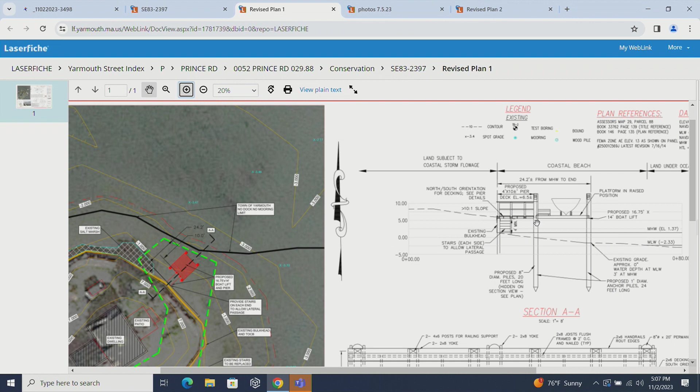So if I could answer that, that dock line was pulled from the town maps. Waterways reviewed the line, they accepted the line, so that's the line. It's no different from a zoning line. You can't just say, I don't like it, because I don't think it's that way. That's the line.

But if you look at all the, do you have that available? Because they did not, when they made these maps, purposely go all along the shoreline, because it would diffuse the coloring of the shoreline. So yeah, I agree the intention of the map is to include the area along the shoreline. I know it is. It's not shown as such. I know it's a broad drawing.

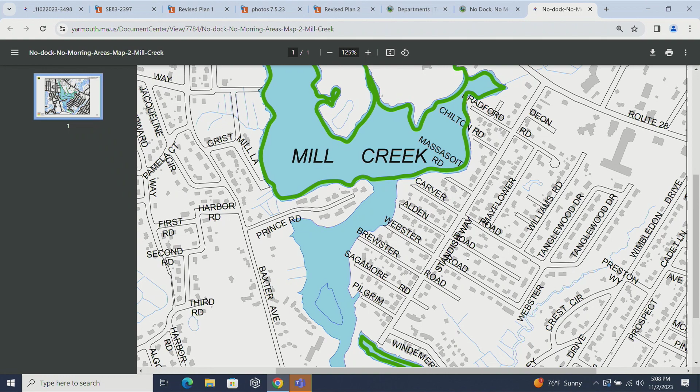Can I make a comment? Hi, Paul Cruz, the property owner, with my wife Nancy Deneen. I discussed with Brittany a bit, and I met with the harbor master. We're proposing to stay out of that dock zone and stay basically out of the channel, which actually sticks further out there. And when the line goes across, the small lift was proposed to stay out of that dock zone. Kind of have a little tiny triangle, because I'm the house on the end there. Just stay out of the no dock zone.

And that's why we didn't propose it on the south side when we went to Waterways—there was a lot of opposition because of a natural channel, the creek everyone's familiar with. So we went back to the drawing board. I met with Bill, the harbor master, and we came up with this little short lift that stayed out of everybody's way and was out of the no dock zone, because everybody at that meeting wanted us to put it on the north side, and I said we can't do that.

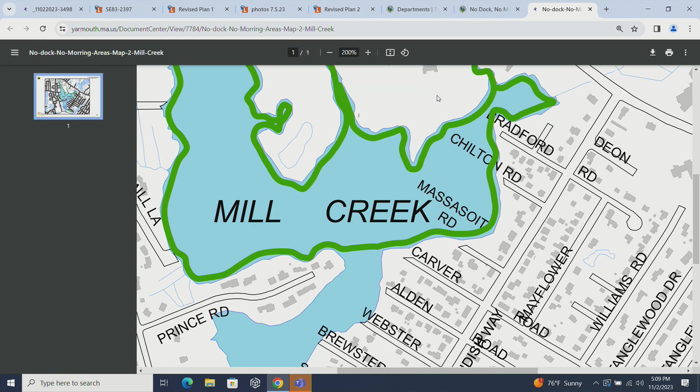There's a no dock zone, and I didn't want to ask for permission to put something in the no dock zone. Just one more comment on the map: if you look at it, his house is shown on the map. Our dock is coming straight out from his house, and you can see that the green line is clearly well north. We're actually a lot more conservative on our plan than that plan is. And that's what it is.

Okay, I just said I had a comment on that. I was here when they made those lines, and yes, it's all along the shoreline, but I believe it was from that corner to the other corner. This is awfully close to that, but that's just my opinion. I was not at that Waterways meeting, so I would have brought that up then.

Okay, Rick? In my 14 years on the Conservation Commission, I have never seen an application with a 0-inch mean low water baseline for this. I'm astounded by the temerity of the applicant to even submit this application. So I think you know how I'm going to vote on this.

Can I comment? That's another thing—it's not zero, that's what it says in your plan. So I have to rely on your plan to make my comment. Mean low water is a line on the plan. We're not proposing anything different. Now, you're nowhere close to the 3 feet we need in our regulations. There are also two other identical facilities permitted in about 1.5 feet of water that you approved. Before my time. All right, thank you.

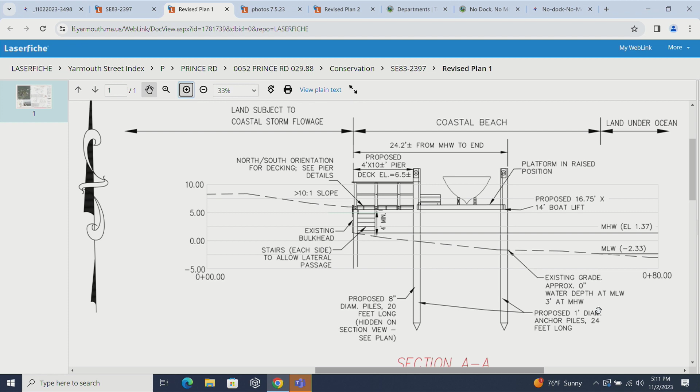Something else they should have picked up too.

Rick, anything else? No, thank you. Anybody else on the commission?

I agree with Rick. I just see it being way too low to allow it to happen.

Brittany? I agree with the depth issue. Even at high water, you have 3 feet at mean high water, which does not leave much time on either side to meet that 3-foot depth minimum.

No other questions? If I could just comment for the record, everybody's saying the 3-foot depth minimum. The 3-foot depth minimum is for floats. We don't have a float, so all the comments are just clarification that there is no float. The regulation is for floats. We don't have a float, so all those comments should be directed to say in the record that the boat is within that, not the float, because there is no float. Just for the record, that's all.

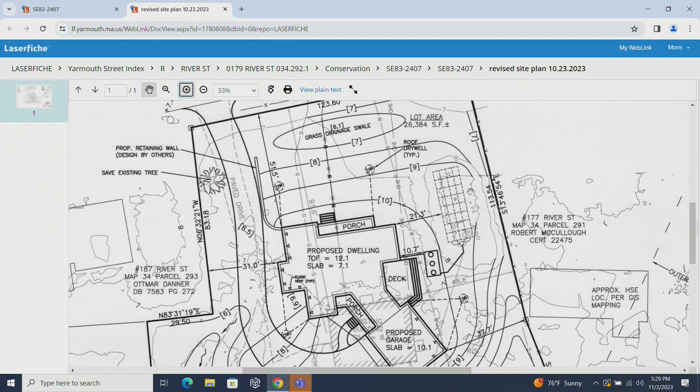I'll highlight some of the changes. We've removed over 1.5 feet of fill from the front of this property. There was concerns about too much fill, so we've lowered the grades, especially in the front, and we've also added a grass drainage swale for that front yard to ensure any drainage water in the front is collected and retained on site. I've also altered the driveway slightly to tighten up that grading in the back, and shown a low point and a swale to the 2 rain gardens to ensure stormwater stays within this property and those rain gardens are properly utilized.

And we've also moved the driveway away from the large existing oak tree with the neighbors there. So I hope that has addressed your concerns, and I'm happy to answer any further questions.

Okay, any questions from the board? Just looking at my notes from last week, so if you give me 1 minute. Okay.

What about the tree? Did you mention that? Yep, so I did make a note that we're gonna save that existing large tree, and I moved the driveway a little further away to not impact the roots. Got it, thank you.

This grass drainage swale on the abutting project, is that - Yeah, that's just shown for reference. I just wanted to make it known that was approved with the abutting property. In reality, that's gonna be a nice low point for all the stormwater to collect there, but I am showing a separation between the two properties and the stormwater there. Okay, thanks.

I know Ellie mentioned last meeting about stairs. Did you? Yep, so I have shown the correct number of stairs on all the decks and porches. It's 4 or 5 risers into those decks and porches due to the grade. Thank you, I see them now.

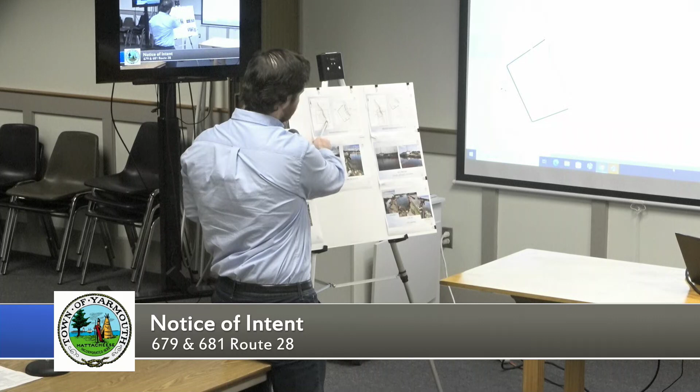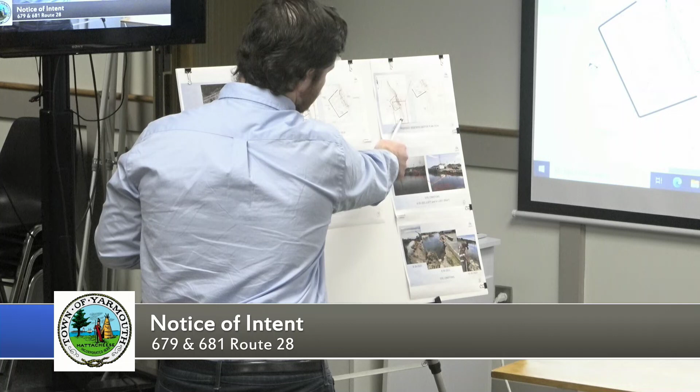As you can see, we're proposing to fill in the area between the existing revetment locations with a bulkhead that will be protected with some toe stones, and then add a buffer strip of native vegetation along the south side between there and the existing building. Here's a section.

Here's a view of the existing site conditions at high tide. Part of the reason we'd like to consider the bulkhead is that the north section of the revetment has already had to be repaired due to erosion of the toe stones, as had the south section. The north section was repaired in 2017 or 2011, and the south section in 2022.

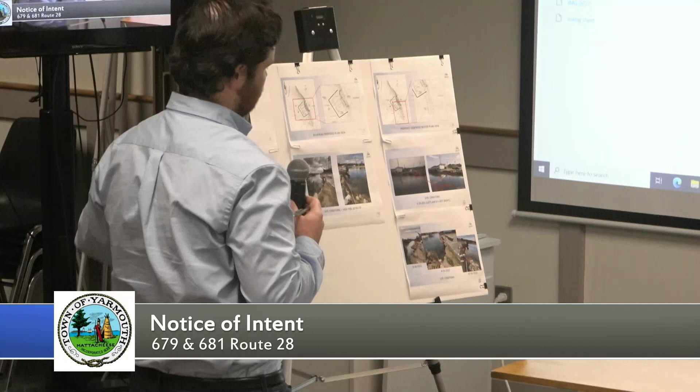Then we have some examples of the erosion of the parking lot over the last year or so. If you'd like me to move that closer, I can. If you don't know the site, you don't... okay.

All right, and now I'll open the floor to questions.

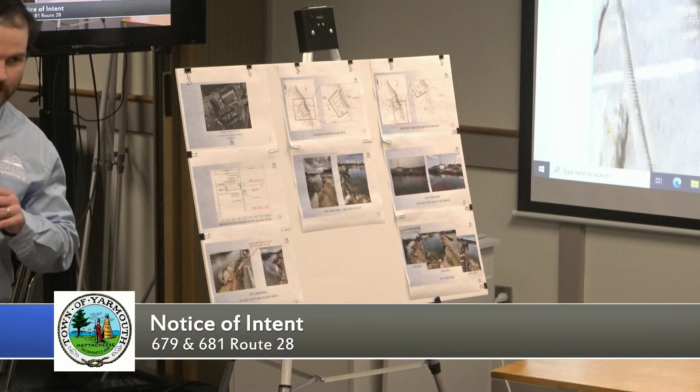Steel or vinyl sheet pile, sheet? Back that up, okay. What was the answer to that? We haven't spec'd that yet.

When we were there the other day, we noticed there are a couple of barriers that block off 3 or 4 spaces. I would assume those spaces will not be put back, that you'd keep that barrier and maybe even plant some plantings there instead. The goal would be to return all of the parking spaces that had been there originally, and then return the posts and rope to their original location prior to the erosion.

Personally, I'd like to see that not happen, and that you keep those 4 spaces from being used and do some plantings there to help prevent possible future erosion. There will be plantings in between the edge of the parking lot and where the bulkhead is, at the end of those parking spaces where they were.

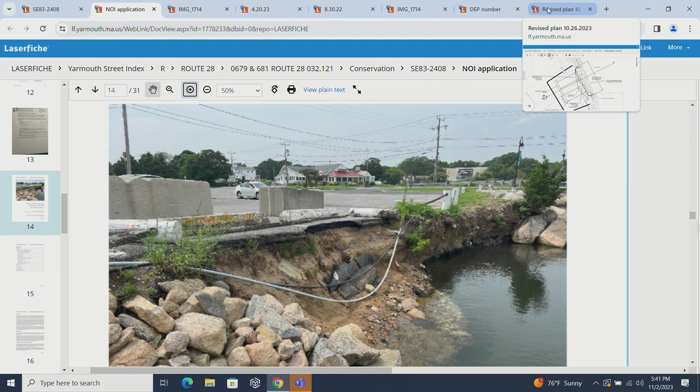And it shows a few feet of fill past the pavement, in the plan. They're going to fill behind the sheet pile sheathing and then repave, so the sheeting will come out to basically where the edge of the parking lot was, is what it looks like to me. Yes, where it was, and then they're going to fill in behind that and put parking spaces on top of that again. And then we'll have, I don't know how many feet that is, between where the sheet pile is and the...

Yeah, and I think this is an important part of the proposal, that there's quite a bit of space right now, grass between the top of the stones and the parking spaces. We're kind of losing that because the sheathing is coming land side. That's a great photograph of it there. But if you look at it, the proposal is for the sheathing to be much closer to the edge of the parking spaces, in my opinion.

It's not going to change that section to the north. Yeah, I don't believe it's supposed to be that way. See where those parking lines are? They go right to the edge of the sheathing. On that photograph you had up, Brittany, it showed a good space between the edge of the parking space lines and the top of the stones. This is north of the area of erosion, though. I understand, but you see what I was referencing with the lines and the parking spaces? Maybe it's not, if they didn't mean to draw it that way.

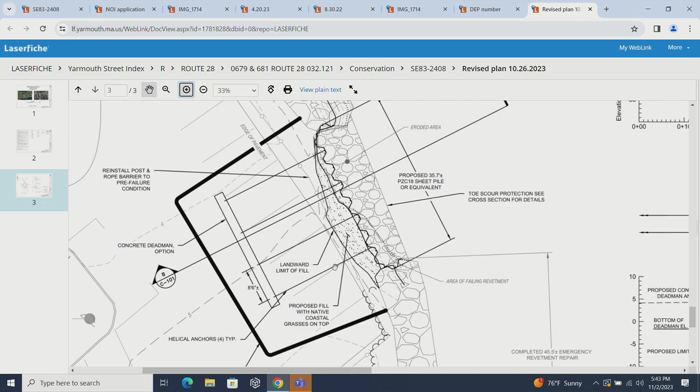My only other question is that we'd like to see details of the plantings. They're just called out as native plantings. We'd like to see some details on that. Some mitigation plantings, the whole length maybe?

We don't always ask for mitigation for bulkheads in this respect, I guess, but at the same time, we're going to be talking about a COC for an emergency order that we did a year and a half ago. That, in my opinion, most of that was caused, or a good portion of it was caused, or was certainly exacerbated by the fact that we have irrigation going full tilt 7 months out of the year behind it.

Great point. The irrigation line is still there, existing. The owner has said he has shut it off. We can shut it off, but we can also turn it back on. That's my, I guess, that's what I was saying a year and a half ago, and that's what I'm going to continue to say now.

I thought that we asked them to remove it a year and a half ago. I certainly remember there were a couple of sprinkler heads that were literally right at the top, and that should have been part of the COC. It's in there in the order of conditions - I think the way we worded it, though, it's number 10, allowed them to either disconnect or shut off indefinitely, or removed, shut off indefinitely.

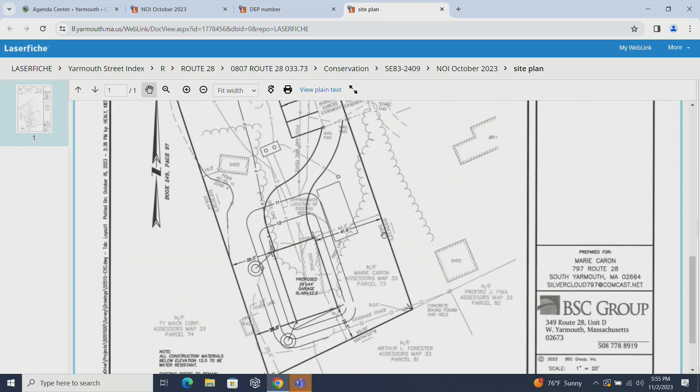We are within the flood zone. There is no other resource area affecting this property other than the flood zone. We are proposing to have the slab elevation meet flood zone requirements, bringing in the least amount of fill we possibly can just to build up the outside of the building. The garage slab will be at 12.2. We have an elevation of 12 in front, then down to 11, matching the existing elevations of 10.5 to 11 as it goes back up to Route 28 and Main Street.

We're proposing 3 parking spaces on the side of the building as you come in. There is a common easement between the two neighbors at number 811 and this property, which is the existing blacktop out there. The property line kind of splits that, so the 15-foot easement on both sides will remain, and access to Route 28 will stay in the same manner it is right now. We're not proposing any new septic system — this is a detached garage and will not trigger any septic flow. It's just simple vehicle storage.

Okay, questions from the board? I'm sure you saw the DEP comment — when is it going to be transferred from commercial to residential? They're in the process; someone's already working on the interior floor layout to remove, right now it's a big open shell because it was a retail store, Annie's, for those who remember. But they've had somebody working on the interior right now. I guess the zoning has to be transferred from commercial to residential, otherwise the stormwater standards still apply.

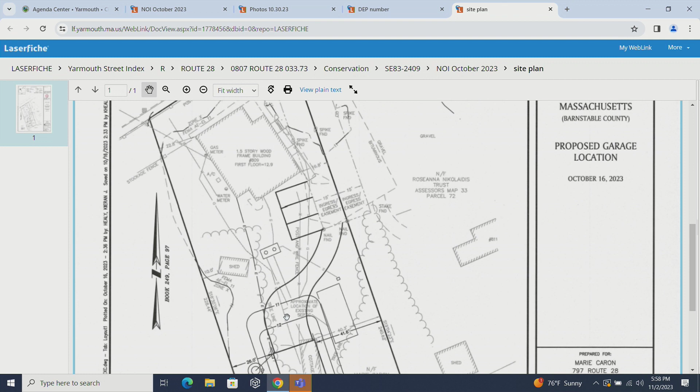I don't see this creating a stormwater issue because the ground all around is just lawn, it's not going to generate that. We also have two dry wells put in for the building itself, you'll see on the left-hand side, to capture any runoff from the building.

The runoff from the building is taken care of, but what about the runoff from the new grading to the other properties on the east, west, and south? We're 5 feet away from that, we don't have a runoff situation like that. The slope is at a 3-to-1 slope, which would be grassed, and that by itself generally slows down any runoff that might happen. Then the bottom area would be flat, and that would capture any water.

If you want, we can put in a trench swale along the edge. I don't think it's necessary, but if the commission would like to see that, we can gladly do that along the southerly and westerly sides. If you're confident with that spacing, then I don't need a trench, as long as the commission agrees. Fine, I have no further questions.

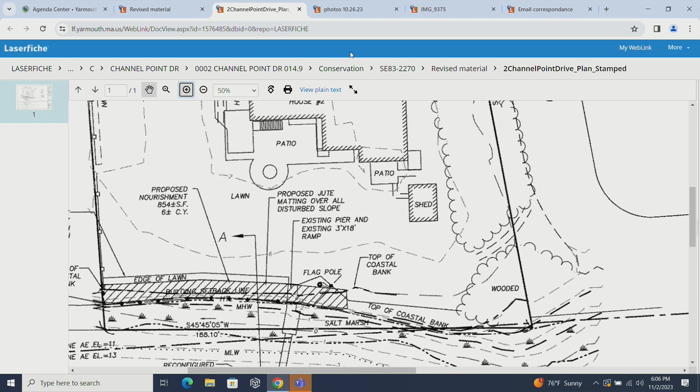Okay, that was not a part of the plan. Was that called out in the letter? No. You can see what Matt said.

Moving on to the slope itself, before we started working out there, the slope was highly degraded, and you could see the vertical slopes there. You can see how it's taken by removing the invasives. The salt marsh is definitely coming back. It's actually going through the sock that's out there, so it's doing a good job. It's holding back the bank, it's stabilizing the bank. It's not the prettiest thing. The first time I looked at it, I said let me make some calls on this because it doesn't look that pretty. But it's actually doing its job pretty well. It's holding the bank, stabilizing it, and the salt marsh is growing through it. So it's doing a good job, and the salt marsh is coming back. That area, you may remember, was originally degraded salt marsh. So that's actually coming back. Again, if you take out the prettiness factor, it's actually doing its job.

I wasn't here when this was started, but there's existing peat down here and it's being crushed, so that is concerning. Yeah, I don't remember what it was like.

Site photos can tell us, from 2021. Even if the log was elevated above the peat, I don't see that as being too successful a means for growing salt marsh or Spartina. It looks like it's not growing through it, it looks like it's growing in front of it, right? This is right when the work was done, not now.

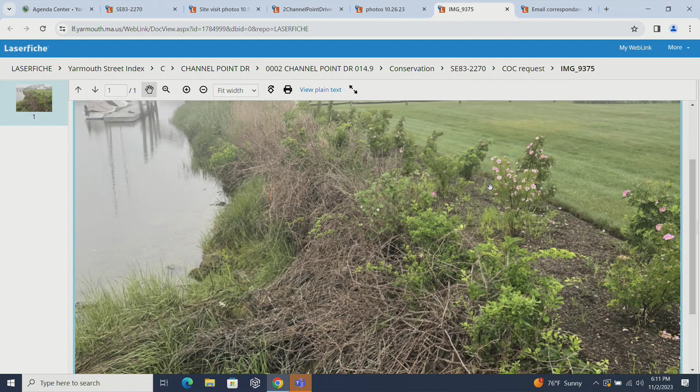Okay. This was before the project. They had put these roses in as part of a different project, and that's why I thought they were supposed to be moved and more planted, which I'm still not 100% about, but it seems like they just made the deck bigger.

Well, no, I would disagree with that. Oh, I thought you said they brought the deck out. We brought the deck out because the plants came out. You can see by your picture that the deck is right in line with the edge of the plants, so we wouldn't have done that if the plants weren't there. So you can see it's right in line, right on the top right there.

So you're saying it started back here? I believe so, yes. Isn't the slope already... I don't know about that. What we can do is go out and survey it and actually locate exactly where the edge of the plants are - even just measuring the deck length would be easy.

I'd like to at least see that, and if you could just take a couple more pictures for comparison to the '21 photos as well. Okay. They don't have any photos of the deck - standing on the deck taking photos.

Actually, that last one there is a good one. It shows how the deck is pushed back, is further out - that's actually a good one right there, because then you can see how the walk area comes inside that.

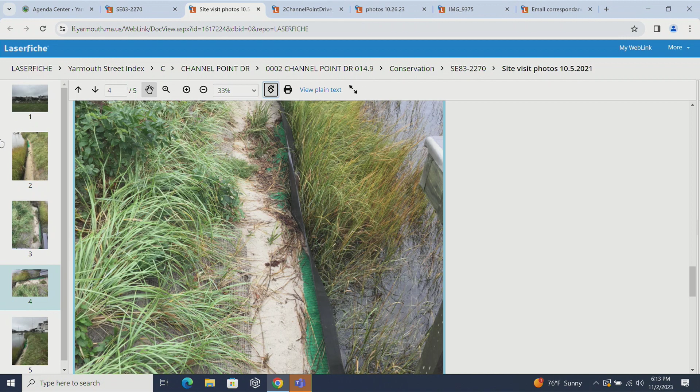Yeah, I think that's all of my concerns. And you were saying that they were intending on removing the silt fence, but it looks like the silt fence is holding a ton of sediment.

So I'm not really sure how to move forward with this. I think his offer to resurvey would be an important element for us to understand really what's there. You agree? Yeah, I'd like to see a plan showing this, and I'll go out and take a look myself, because I'd like to put my feet on the ground for this one and see what's going on. I don't know what to tell you - I'm not getting a good feeling with it, but at the same time, I see what you're saying too.

If you could give me a call, I'd gladly meet you out there so we could walk it. Okay, I will do that. Should we just continue? Yeah, do you mind continuing? No, you might continue. We want it to be right and we want the commission to be happy when we close it down.

Okay, can you get everything, the new survey, by December 7th? How much time do you need? Let's plan for the next meeting. I'll try and have it in for a week from tomorrow, Friday - is that the 19th? Yeah, if you can get it turned around that fast, that would be fine. The 16th. And then I'll try and meet up with you Monday - I'll aim for Monday. But I'll give you a call.